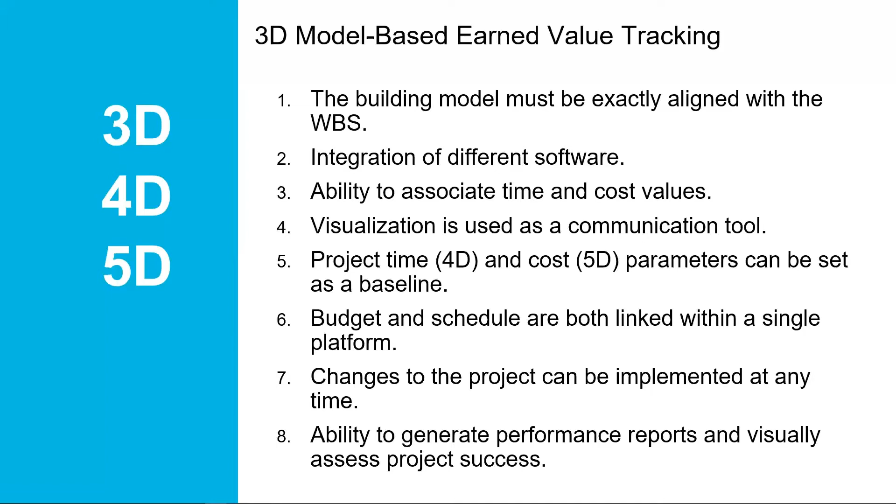And then any changes to the project, you must be able to implement them at any time during design or the construction process, right? The updates must be able to be made as soon as possible and then communicated to the entire team so everyone is on track. And lastly, the system must have the ability to generate performance reports and ratios at any point during the project, and visually assess the project success. So implementing 3D model-based tracking systems in your organization.

So as you mentioned, these are guidelines for best practices. Yes. So when we do 3D, for example, we know that Penn State has a good guideline for how to do your BIM implementation. Or, for example, U.S. Army Corps of Engineers has their own, or AGC has the CM BIM. Is there a 4D guideline or something that we can introduce to our audience? Or have you heard of something like a best guideline or best practice for 4D and 5D BIM? Not that I've seen, no.

The one I'll say is close is the Penn State one, the BIM execution plan, because it goes as far as telling you how to set up the project for coordination. Oh, it has 4D? Oh, okay, I didn't know. Coordination is the step before sequencing. So once you have your model set up for coordination, you can use that for your sequencing.

Through Autodesk Revit and also Navisworks, 4D construction videos can be generated to help assess the impact of proposed design, and it enables the allocation of optimum resources across the project lifecycle. Based on the information you've put in Revit, you can sort out the building elements and create sets, which tie your elements to the schedule. And also in Navisworks, you can create custom properties.

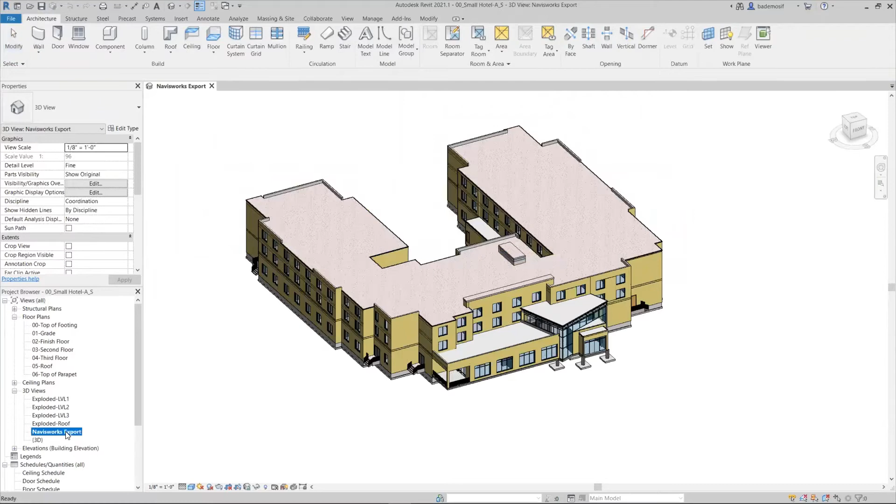And once you're done, once your model is ready for export, best practice, I've already done that here, is to just duplicate that view. That's just best practice. Duplicate the view and you rename it.

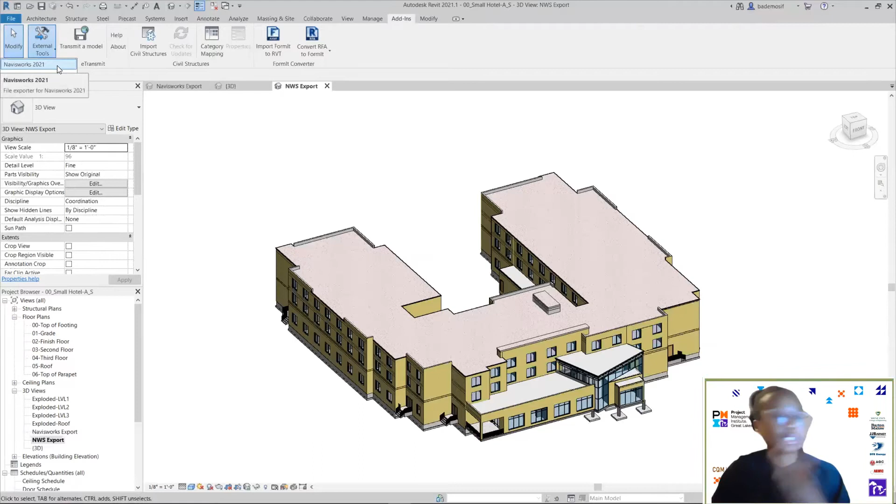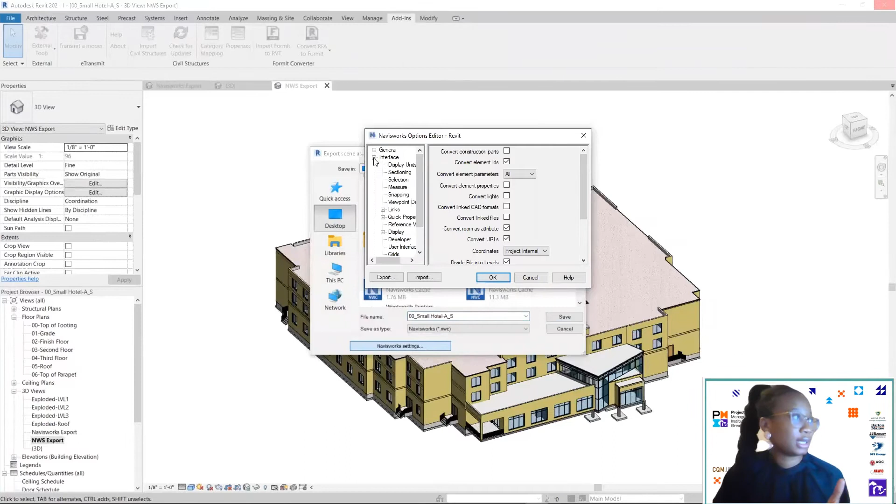So once you're done, you would go to your add-ins tab, and then under external tools, you would see Navisworks. So you click on Navisworks, whatever version you have, and you select the name you want to save it as. You select the location. So for instance, it could be our desktop. And you want to double check your settings, because by default, it saves things in like meters and centimeters. So you want to make sure you change your display units to feet and inches if you're using feet and inches.

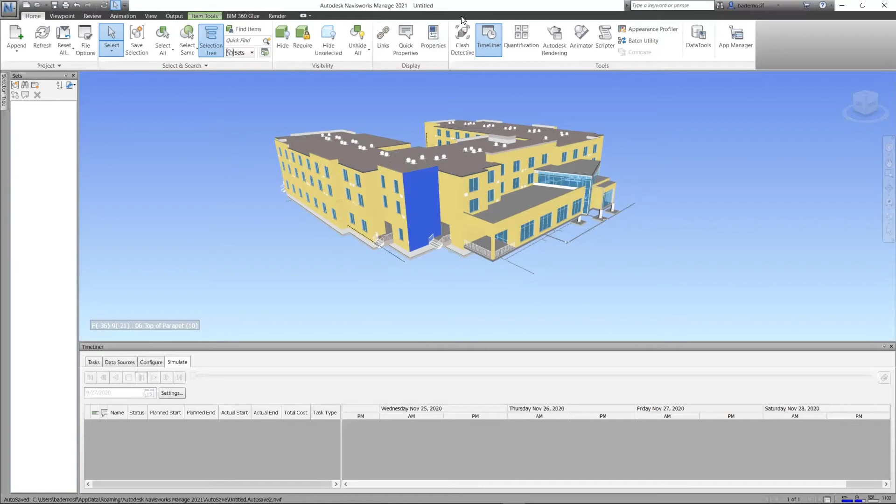So in Navisworks, you can see exactly what you saw in Revit, but then there's several tools that you can use. So you can click on an element, like I said, you can add properties to it. So you can do that under the properties palette if you wanted to add your properties, and there's several ways to create sets. You can do a search set, or you can do a selection set.

Then when we are done with our sets, we're going to go to the TimeLiner. So you can click on home here, it will pop up. And then here you would see your tasks. So you can add tasks manually. So if you wanted to just type in, you would select your start date and your end date, right? So that's the basics you need to start your simulation. And if you have your cost as well, you would include that. So this is one way to do it.

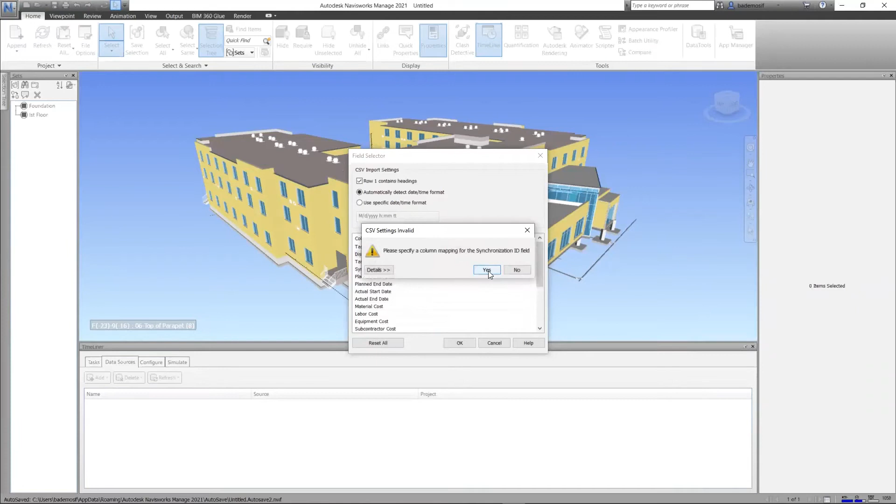The other way is to import from outside sources like your P6, for instance. And to do that, you go to data sources. You would go to add, and you can import directly from Primavera P6, the different versions. So it's really straightforward. It's intuitive. You just have to match up the columns to your P6 schedule columns, for instance. And once you're done, you click OK. Just say no, and you have it.

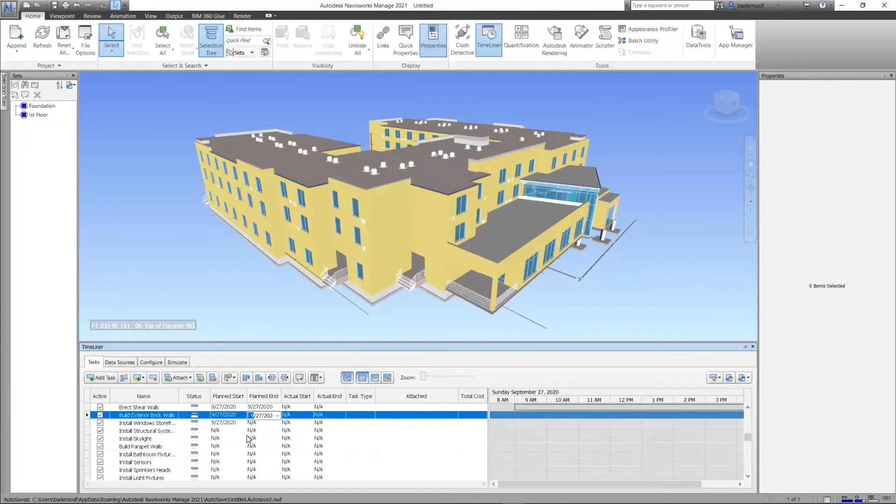So you want to refresh, so you would click on that and rebuild your hierarchy. That's okay. So when you go to tasks, everything that was there has been populated. And because I didn't have my start and finish date, this is NA, so you can put that in manually. So I created the sets for my structural, my utilities, my services, and my architectural. So you will do all of that under here.

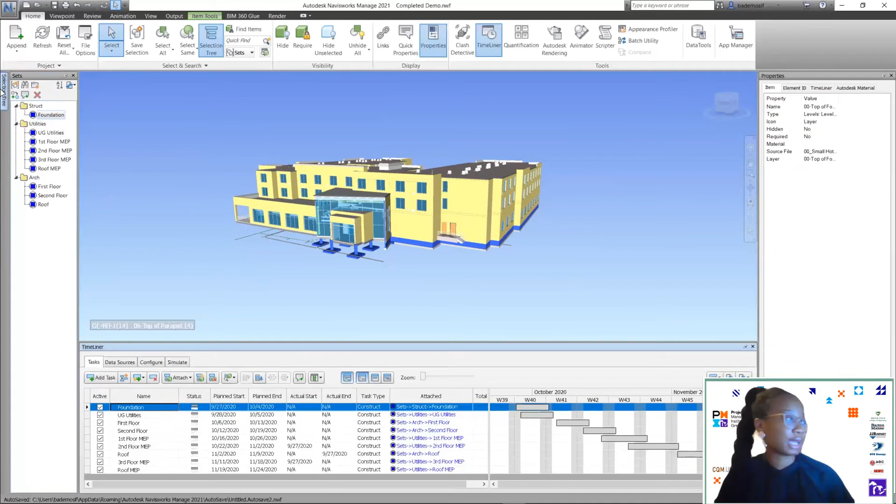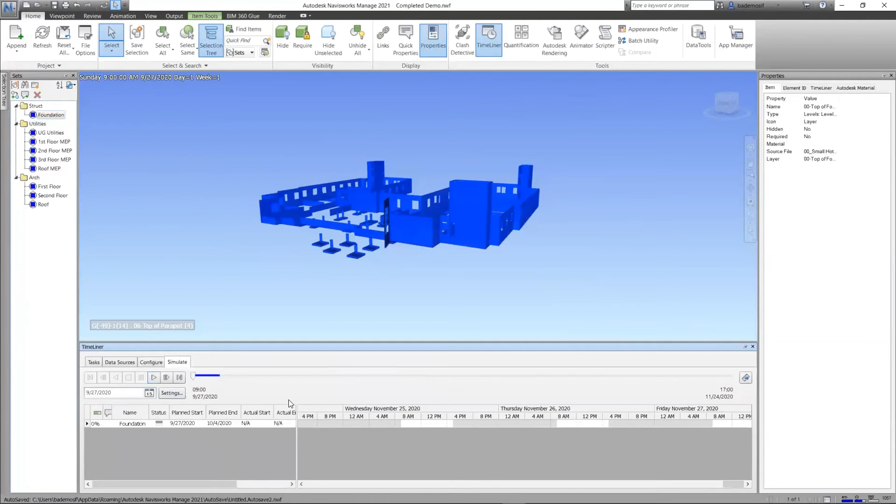And then, like I said, you can manually just drag things to the task, and it will attach the elements to that task. So for selection sets, which we've done, you can only do one at a time. You can only attach one element or one set to a task. If you wanted to add multiple, then you would use your search sets, which is adding rules and things like that. So once you have all of this set up, you go to simulate, and you press play.

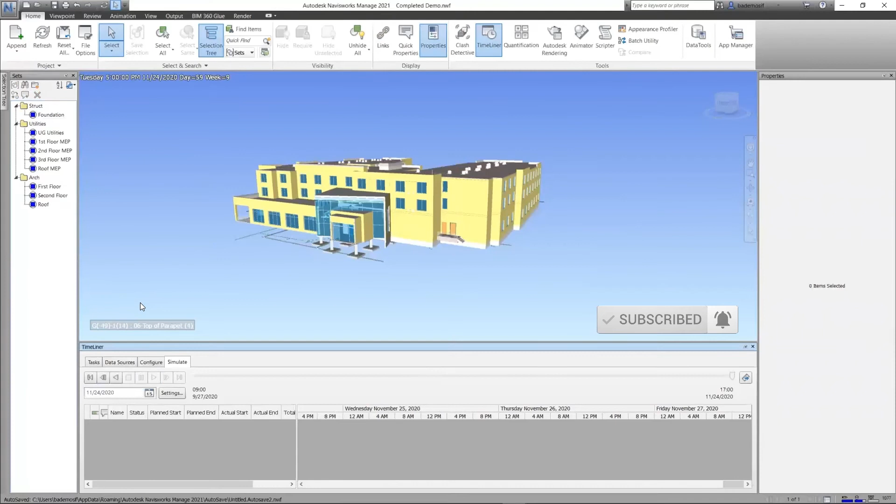Let's start from the beginning. You press play, and then you see things start to come up in sequence. That's the basics of what you can do with the TimeLiner. You can also, when you have your actual dates put in, do your actual dates sequencing, and you can also do a planned versus actual so you can compare. So that's a quick demo.

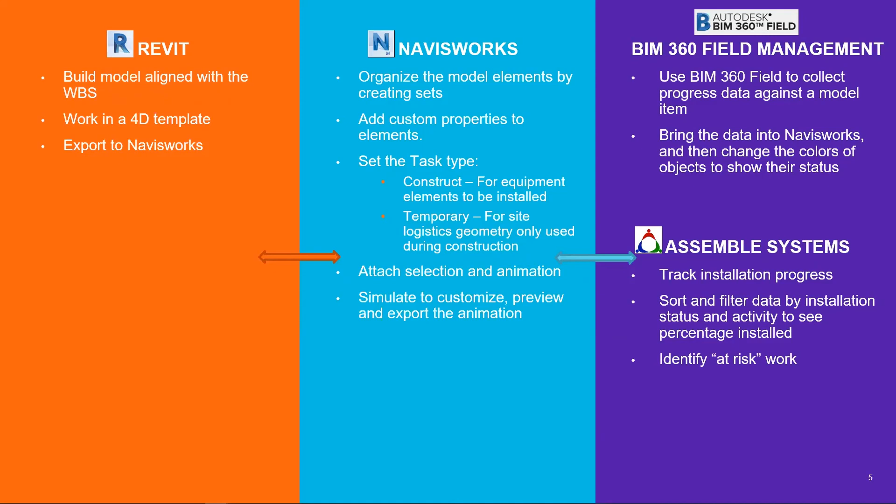And just to wrap up our discussion, like I said, there are other platforms. The ones that I also use are BIM 360 Field and Assemble Systems. With BIM 360 Field, you will put in your progress reports, pictures of completion, inspection checklists, quality assurance checklists, and you can synchronize that information with Navisworks and change the colors. And then, like I said, with Assemble Systems, you can track installation progress of elements. You can sort and filter to see percentage installed, which also directly relates to the cost of the project, and see if the project is within budget, under budget or over budget.

So I've shown you an overview of the 4D based systems, and we had started talking about the benefits, but there is no doubt that the 4D based systems are more beneficial than the 2D methods. Because these platforms are based heavily on visualization of the project, they help facilitate weekly progress meetings, because the team will be able to see plan versus actual work complete, overall inspection status, quality aspects of the project, and so on. I highly encourage organizations who haven't started digitizing their 3D and 4D workflows and tracking methods to just start doing them.

Well, good news for you and for your students is that we don't have enough BIM 4D consultants in the industry. We are seeing a lot of 3D consultants, but 4D is an opportunity for young students, young engineers and young construction managers to really get into and become familiar and experts in it. And companies will definitely look for that kind of talent and skill. So that's good news.